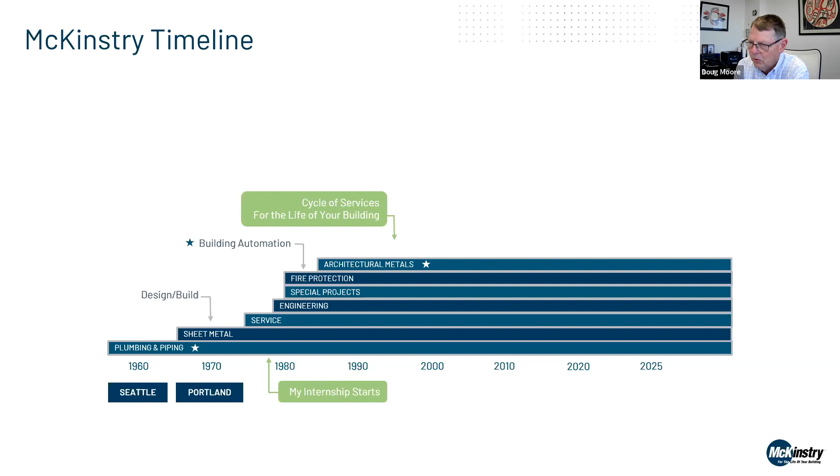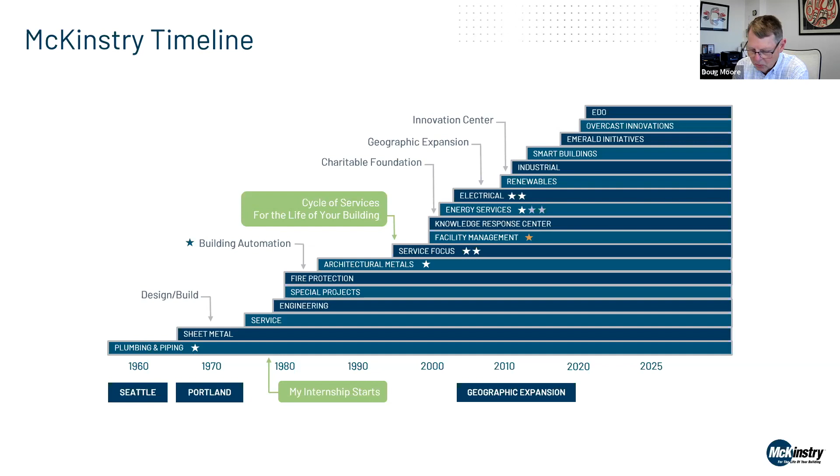So, in our planning meetings, we looked at our cycle as a company, and we would ride the economy up and sort of ride it down as we followed the new construction waves. We worked hard on some strategy to see if we couldn't level our revenues in down years. That gave us a focus on existing buildings and the tagline 'for the life of your building,' which was a real rallying cry. After that, we added additional lines of business, primarily focused on serving customers for the life of their building, not just new construction or major tenant improvements.

Again, two offices, even up through 2003. But as we started our energy efficiency work in 2000 as an ESCO, or energy services company, that allowed us to start moving across the country. So we do work in about 35 states now. We have an office staff of about 1,200 people, and field staff of 1,000 to 1,500 in the Northwest, depending on the construction cycle.

As we've evolved, we've come to these core beliefs: half the energy is wasted in the built environment, and half of the labor in designing, building, and operating buildings is wasted. These are generalizations, certainly, but we keep them in front of us because it points out how much customers need us in the built environment to take the waste out, either in energy or in labor, to lower cost. It also shows us how much innovation opportunity there is in the built environment. And this is our vision.

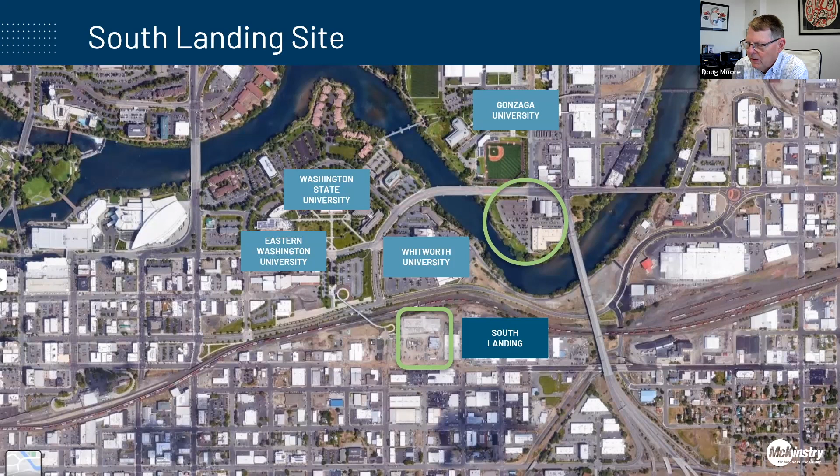And this is the project site, South Landing. It's on the other side of these railroad tracks, and definitely in the path of progress for the universities.

As the bridge was built, they thought, well, having the landing of the bridge be a substation is not the best for the universities. So let's change our plans. They made this property available for development, and there still is then a stress because that area needed a substation. So that's a whole other story.

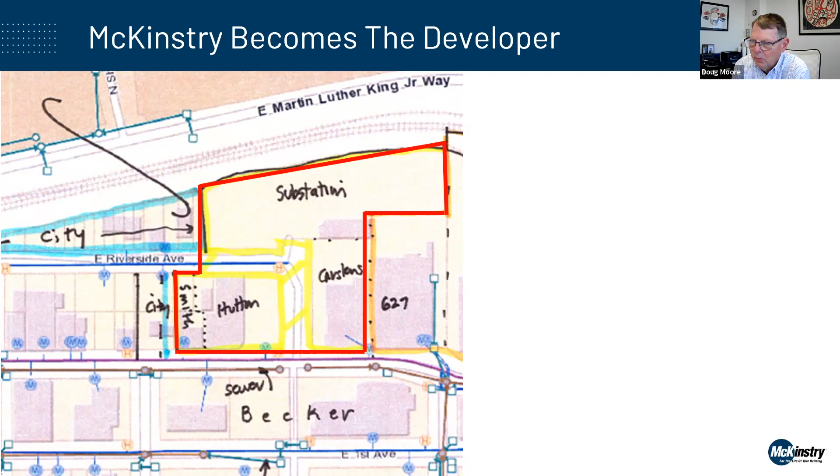But the utility has been a customer of ours for about 20 years, and through a turn of events, we became their developer. Certainly, the idea was to get a building underway. There was one university with a large program for computer science and electrical engineering, and they needed at the time about 70 or 80,000 square feet.

So Avista wanted to get this building going and see if they could lock up that tenant and use this as a way to get the district started south of the tracks. The initial pro forma was a 5-story building, steel and concrete, and code minimum. But the utility certainly didn't want a code minimum building. They were interested in how far energy could go in a project.

McKinstry, in signing up as the developer, our expertise is in designing, building, and operating buildings, primarily mechanical and electrical systems. But from an energy point of view, we have a holistic look at buildings, and we wanted to see if we could do something special as well. The site actually includes 3 other parcels, which were for future buildings.

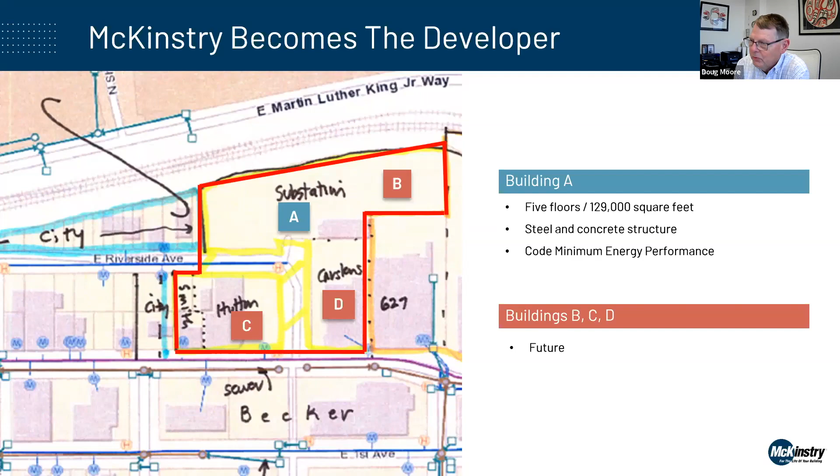So let's talk about budgeting. We had the 130,000 square foot building, steel and concrete, complete through finish and operations in the pro forma. In addition, we put a separate budget unrelated to the construction budget of 2.6 million, which we just labeled as improving the building generically. We did have line items, but there was no intent that the money would follow those line items. So that was our first step in trying to enable the building to have some additional features beyond minimum.

Also, we worked with Eastern Washington University as an anchor tenant. They have a lot of their own buildings in a portfolio. We used comps from the area, and did some extensive energy modeling. We came to an agreement on $1 per square foot per year for energy for the building that was to be built for their program, which would include their evening use of classrooms and so on.

So the benefit they got was a fixed price, but a low escalation. We put, I think it was a 3% escalation annually, which is lower than energy costs today are escalating. So they saw that as a benefit for the life of their lease. And what we saw then was the opportunity to have all the energy spend in our op cost, so that we could look at things like this.

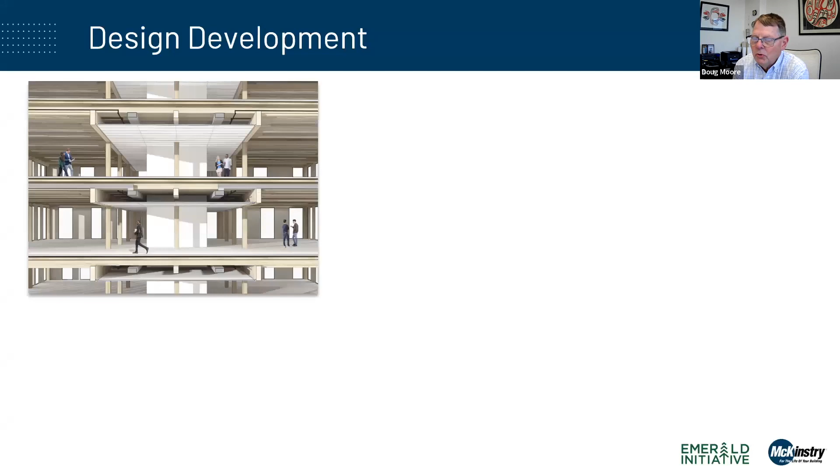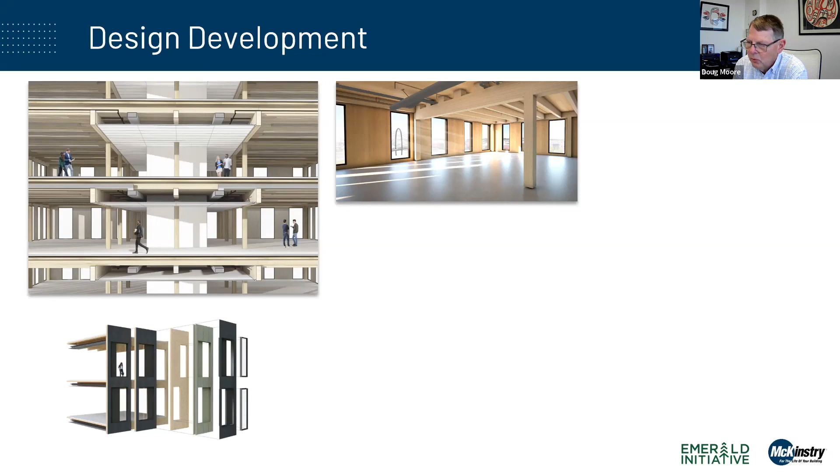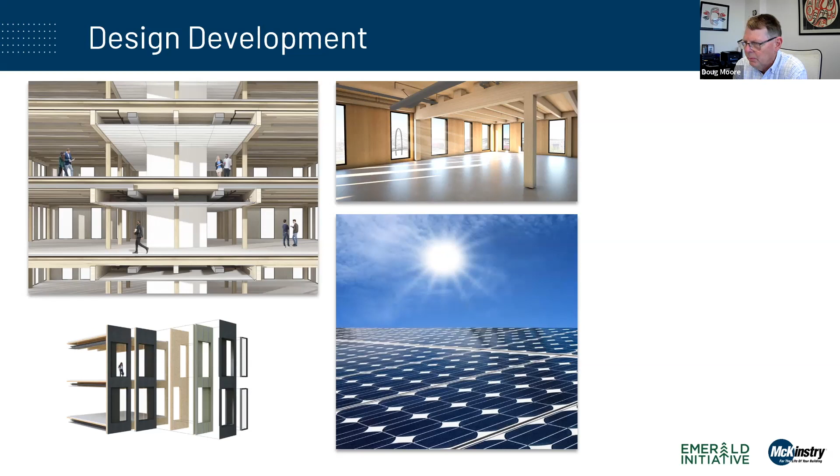So as the design progresses, early we did change to CLT. We started to get renderings of what the interiors might look like. We then looked at what we could do to reduce the energy use on the building, and so the building envelope became a focus for a month. At the end of that, we decided to go a passive house envelope. We certainly were going to put PV on the roof, but we looked at many different strategies for energy.

The building grew in size - we added a half floor at the lowest level. The structural grid was optimized for classroom use, which was a little hit to the budget. That smaller grid was more optimal for CLT. The CLT at the time was not a prescriptive path through the IBC, and so I think we had 8 different alternative means and methods submittals for permitting.

And then the EUI on the building - we think we would have been under 20 for maybe what you call typical office tenants, maybe not a technology office tenant for sure. But because of classroom use and computer science and computer labs, our EUI is about 24.

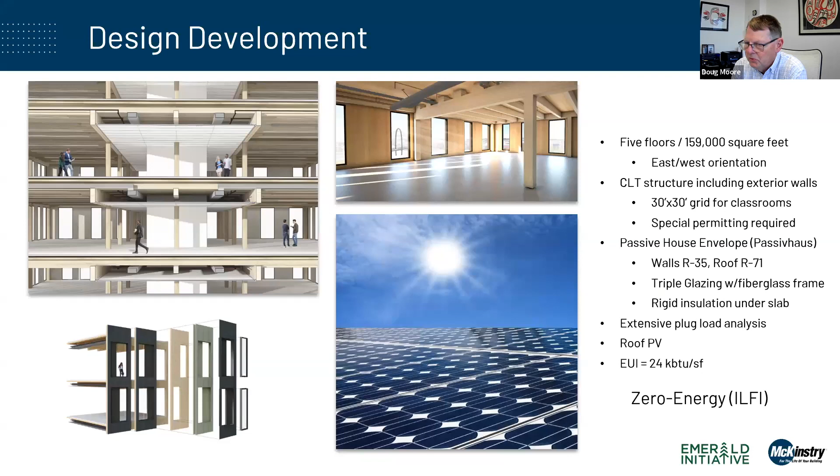So along the way, as we were looking at energy use and what we might achieve, we decided to go zero energy and use the ILFI certification.

So one of the areas that we spent some of that discretionary budget was countless energy runs and modeling. This is the most we've ever done on a building or set of buildings. In this slide, this was just showing one snapshot of the annual heating and cooling requirement and what kinds of equipment we might use throughout the year.

Where this started to become important is as we were working on what was going to be the central plant, we decided one of the energy use strategies was to put in a central plant instead of package equipment. We needed to know what the loads were to start to size those components and do it with an energy efficiency point of view in mind.

But then we started to look at zero carbon and what would that take, and we thought, hey, we've added all the risk we can handle with zero energy, so let's go ahead and take more risks. So we decided to go zero carbon as well, and that meant getting rid of the gas boiler plant and putting in an electric plant, and then certainly no gas in the building for heating of hot water, for any restaurant uses, and so on.

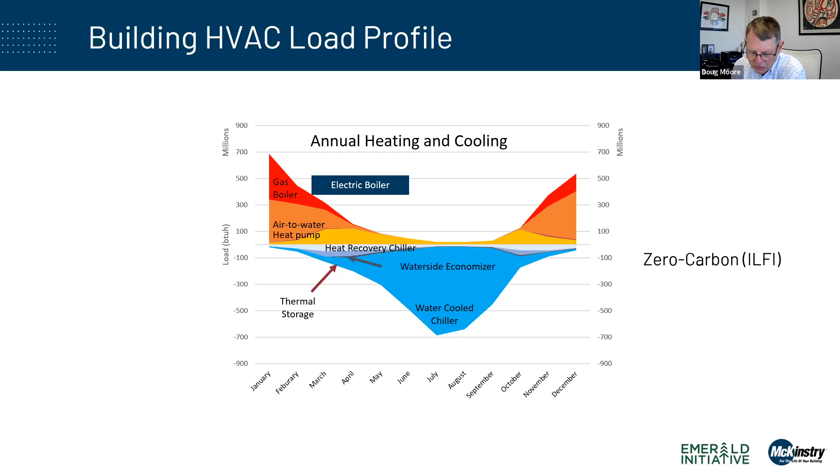So now as we start to think about the central plant, as design builders and estimators understanding the cost of these systems, we decided to take a month and set up a model for the central plant that had all of the different types of equipment, the size options for the equipment, the energy performance for the equipment at each size and within certain operating parameters.

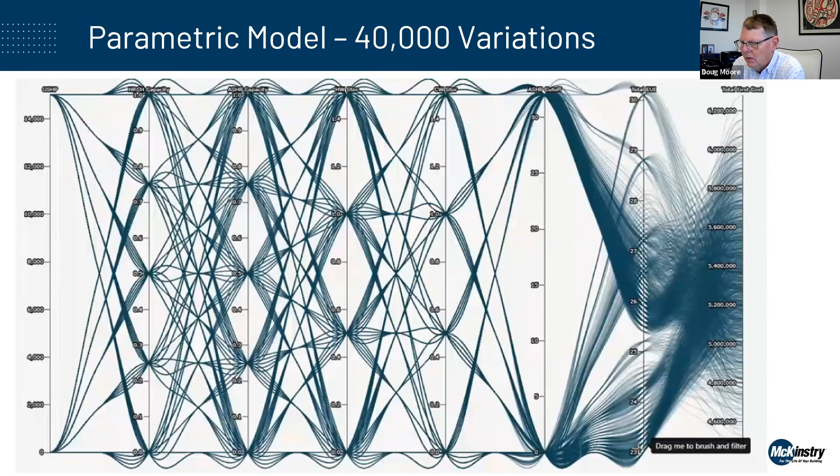And then we had to benchmark that against an ending EUI and the plant's allocation against the total EUI for the building, and then first cost for this plant. So it was like 40,000 runs in the end, but by spending a month and really funding a really good study, it made a very easy decision at the end.

The second bar from the right is an EUI bar. Sorry, these are hard to read. That right now is capped at 25. But what you see are three choices that were in there for plant options that kept us in the range of a 24 EUI and a reasonably low first cost. That was the whole game, was to figure out a cost-effective central plant.

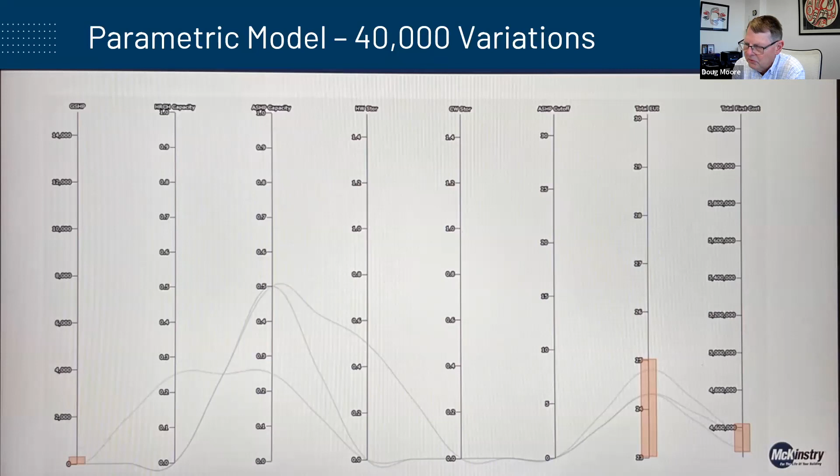So building A was the building certainly that we were underway on, and we found ourselves without room for a central plant. The program grew for the anchor tenant. They ended up taking about 3/4 of the building, and we didn't have the ability to go underground. This whole site is basalt rock. We even had unexpected expense to do some blasting to get rock out.

So we needed another slab on grade location. Fortunately, we had 3 other parcels, and so we decided to accelerate a second building. So we had a location for the plant, and we thought, well, we'll just do a 2-story building, and on the first floor somewhere we'll put this plant. The 2-story building, as a developer, was not a good idea. That didn't pencil in a pro forma.

These are independent properties. So we decided to go ahead and make that a 4-story building so that it would pencil. And now we took on additional leasing risk. So the risk is compounded as we move along in the project.

And then we decided, certainly the plant is going to go in this building, but we wanted it to be on storefront so we could showcase the plant to the community. The idea of this development, as it was evolving, was a public-private partnership around energy and the future of the built environment related to energy. And so we wanted a way that students on campus or the public walking by could see that.

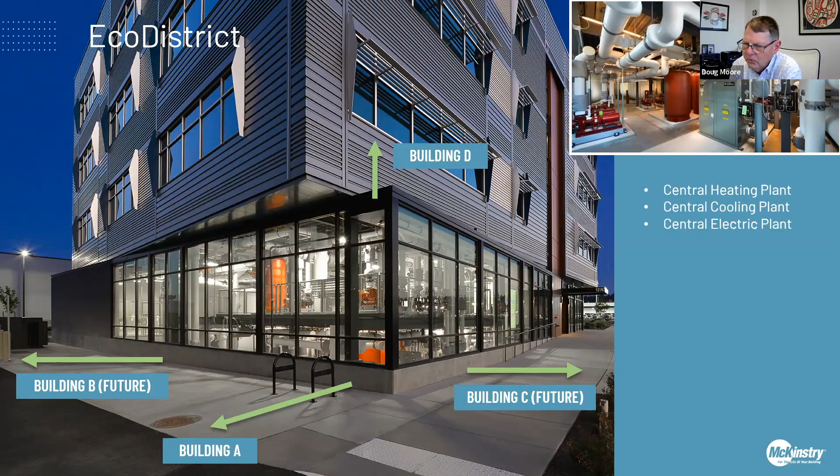So they chose to, through their abilities, allow all the electricity to run through here, which was unique. But more importantly, it started getting them into the conversation of a grid integrated building, and this became an eco district serving 2 initial buildings, but also it has connections for the next 2 buildings. And so this central operation was really interesting to the utility.

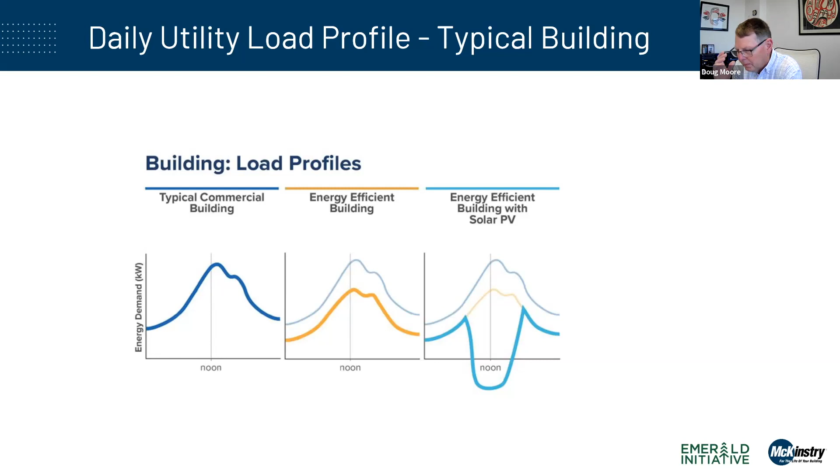And their conversation was, we already have all this variability on the grid with renewables and all that world we live in. And now, as the world goes zero energy, look at the other compounding effect that we have in serving buildings that have widely varying loads, either by day or annual. So this was their interest in how buildings should operate on the grid.

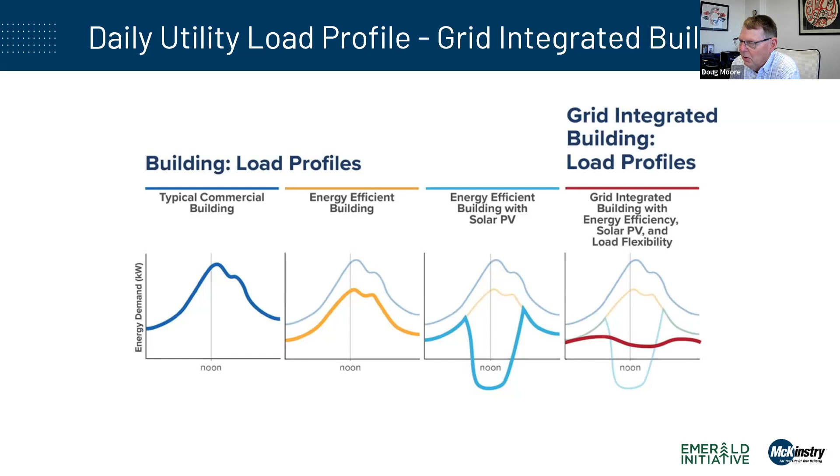And to do that, they joined us as a partner in this eco district. So they're a partner in that, and it's a separate entity. And we expanded the thermal storage, and we have battery storage added to the plant, although the supply chain has caused us a problem there. The batteries are not yet delivered. We thought they would be here by now, but they're not.

So as an example, in the thermal storage, we put substantially more storage in than we needed just for the energy efficiency interest of being zero energy. We can carry the building for a full day on a peak heating day in the winter.

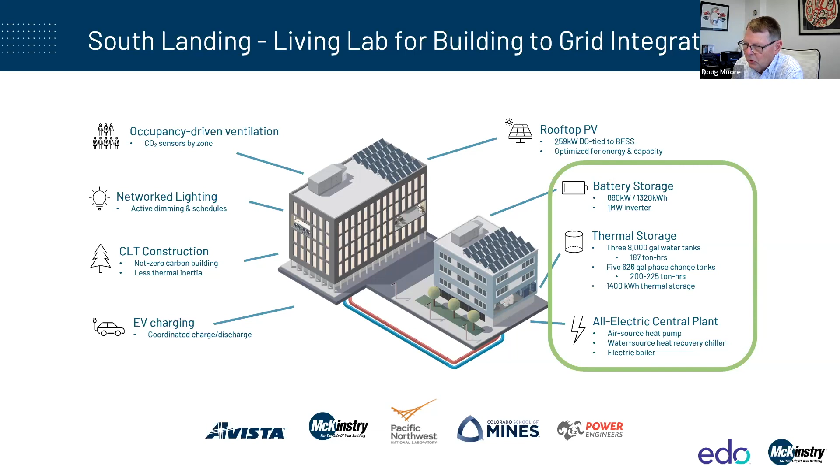And these thermal storage tanks are changeover, so they can be heating or cooling. So with batteries and thermal storage, now we have a real opportunity with the utility as a partner to look at how we can decouple these buildings from the grid.

We have a lot of expertise in real-time monitoring buildings and operating them from a thermal comfort and energy use point of view, but adding the grid component into the strategy was new to our team—writing those algorithms and understanding that in detail.

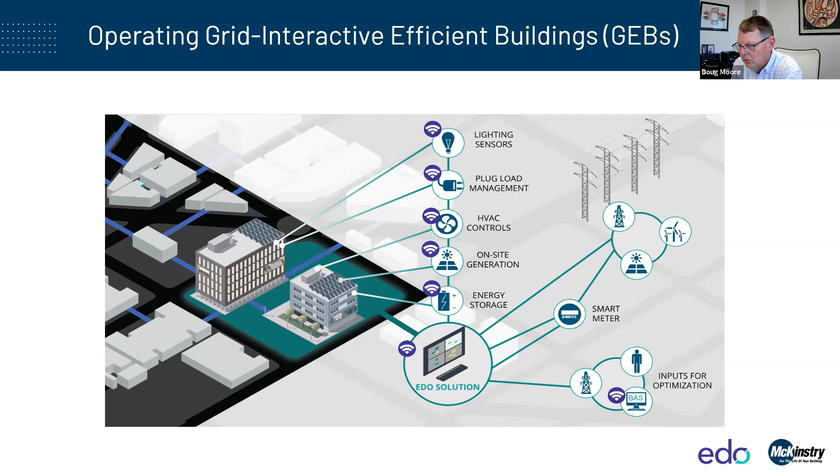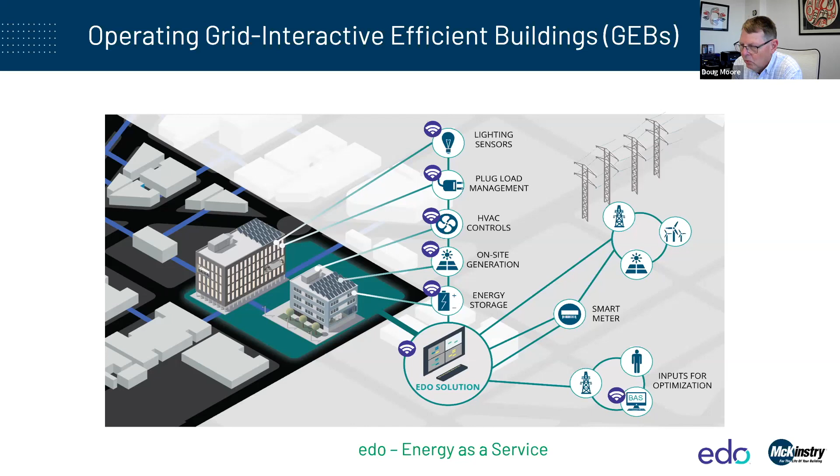So with the utility, we formed another company, an operating company, to operate these properties, but also to provide the service to other customers—energy as a service, where you're not only serving the needs of the building for thermal comfort and low energy use, but also taking grid signals through the utility and getting hired by utilities elsewhere or their customers. So that's another company that came out of this.

So we got the building delivered on time. September 2020 is when students were in class. Zero energy, zero carbon. The second building, which had to catch up, it was quite a complication—when we decided to put the plant there, it now had to finish on time with the first building, but it started substantially later. But it came on in September 2020.

So now let's rewind the clock a little bit. I skipped over the tenant improvement topic. So again, turnkey TI work, including FF&E, and the rendering you saw earlier in a wood building.

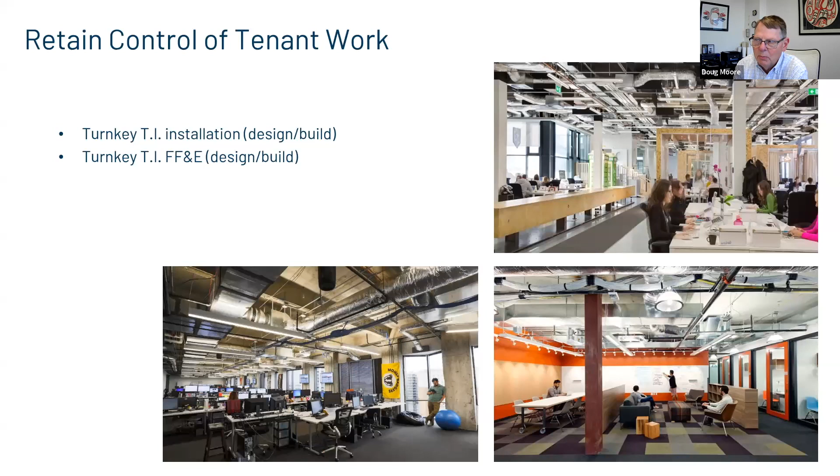We started to think about the MEP systems, and we were the design builder of those systems. So what would happen if we did the industrial chic look like other steel and concrete buildings? We thought, well, that's probably not the best look for our building, because this is what our building looked like.

Initially we had a budget for ceilings for steel and concrete, and when it became CLT we decided we wanted no ceilings. But then, are we going to be the biggest problem in mucking up the look of the building when you look up with our mechanical, electrical, and data systems?

So we thought, well, how do we organize against that? The architect may well need some ceiling clouds for acoustics. And if that were to happen, maybe we could talk the architect into using them throughout the space, and that might give us a way to land MEP and data devices and begin to organize ourselves visually.

And so that's what we did—we put ceiling clouds in as a design. We had to develop and create those, both with finishes.

We went through several iterations of how do you build them, what would be on the devices or on the clouds, how far apart for lighting, and how we organize the MEP pipe and wire above the clouds. So you see cable tray with duct and pipe and line voltage actually in the cable tray, and we had to go through some permitting hurdles for that.

But this ended up becoming the organizing element. Just some other pictures.

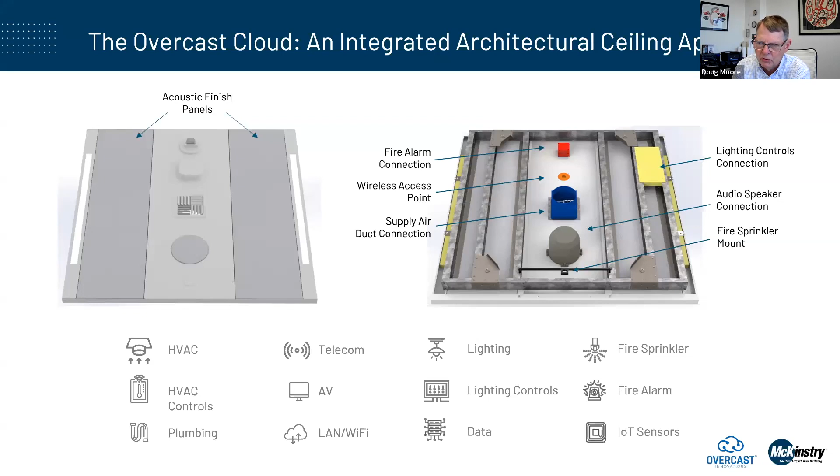And that journey—we have never developed a product before, especially an architectural product. So then the iterations we had to go through of, okay, well, besides just what we did in our building, what systems could land or be involved in clouds?

We knew what we went through to change the who-does-what during design, procurement, off-site work, and on-site work on our projects, but we had to be much more thoughtful, because when you bring these ceiling clouds to a project, it changes who is designing the component, who is providing it, who's commissioning it, and so on.

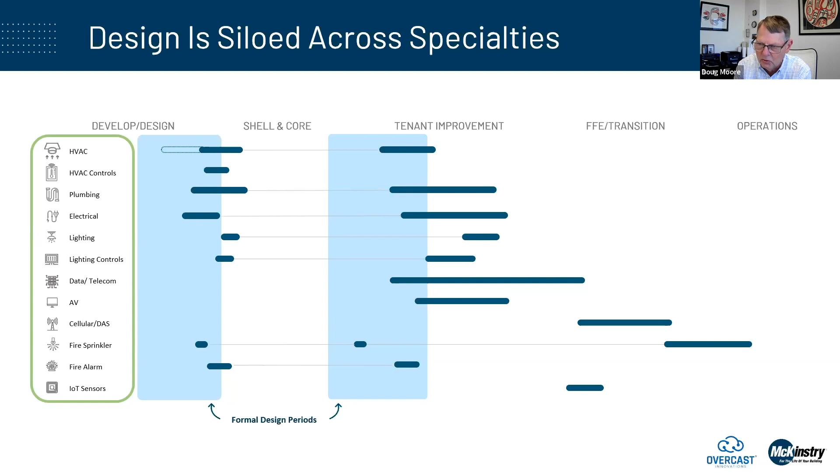So we had to be ready for a design team to help them work through these changes. Otherwise, what could be a good idea for a project would just get stopped because it's difficult to understand how to put it into the project.

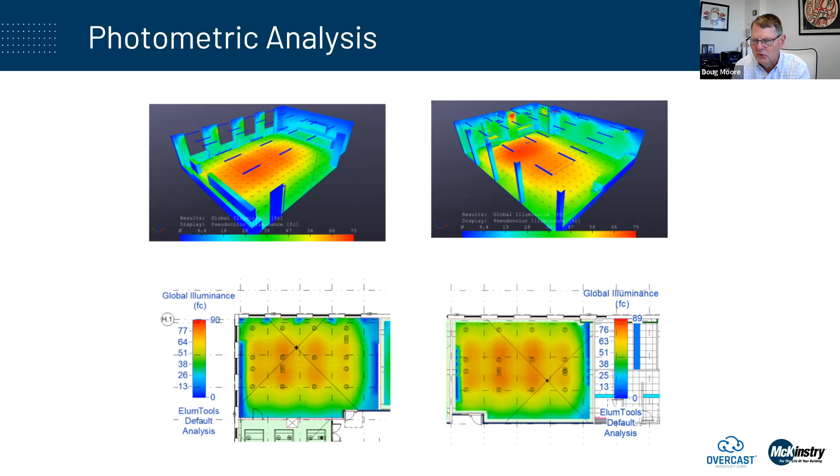When the architect is moving ceiling clouds and the lighting is on the cloud, in some respects that complicates the photometric analysis on a project, because now the architect is just moving lights as they move a cloud. So we added photometric analysis in our team in case that was a need on a project, in case the lighting designer or electrical designer wanted that to stay with the cloud design.

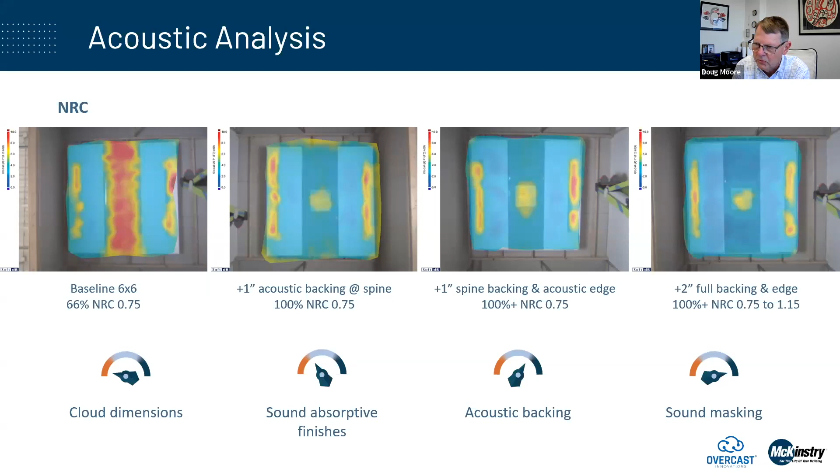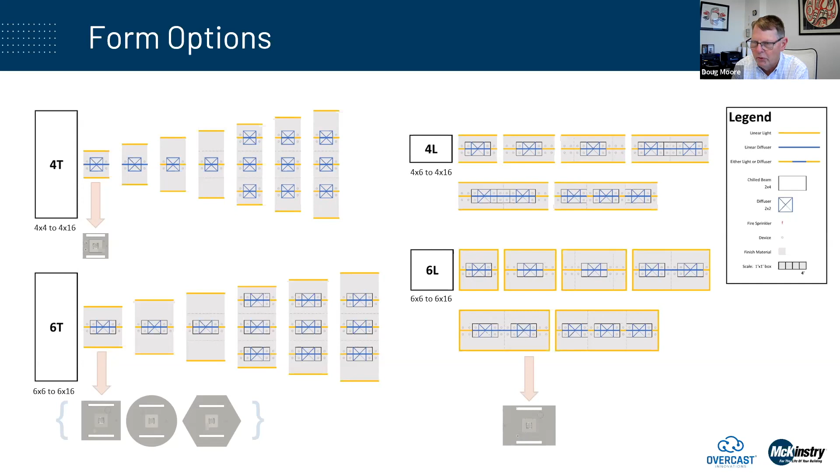We did a lot of acoustical analysis so that as we added different finishes on clouds, the architects could have information for the acoustic absorption of the clouds. We certainly were in the seismic zone, so we added seismic options for the structural system of the cloud. And then we looked at different configurations that architects might need or enjoy, rather than just one or two sizes or shapes.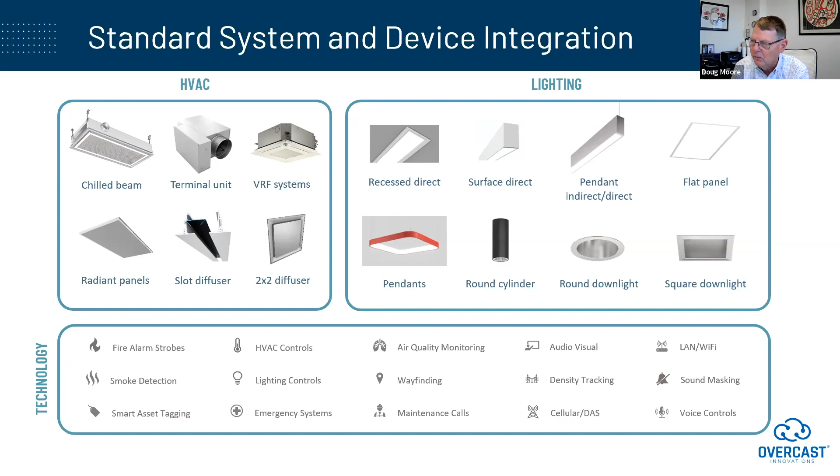And then we went through lots of different finish options we could provide. One of the hardest parts was actually looking at all of the IoT and data intelligence on the clouds. That's one of the big opportunities, that it comes as a system with IoT, so we had to be ready for all of the low voltage and wireless information.

One of the last things we had to do was help with draft documents for the change in contracting on projects, when all of a sudden there still are the mechanical and electrical consultants and installers, but now you've moved the cheese on everybody's plate for who's going to provide, design, or install various parts of the systems.

So we've done a lot of work to be ready for teams to go through the process of being contracted appropriately. And we have found in this journey, we now have several OEM relationships with our factory, so that as we provide a cloud, we're working direct with the factory for lighting or temperature sensors and so on. We're starting to see how much markup there is in the supply chain we deal with on all of our other projects, one reason why building costs so much. So there's a lot of opportunity as you move off-site with manufacturing to take some of the cost layers out.

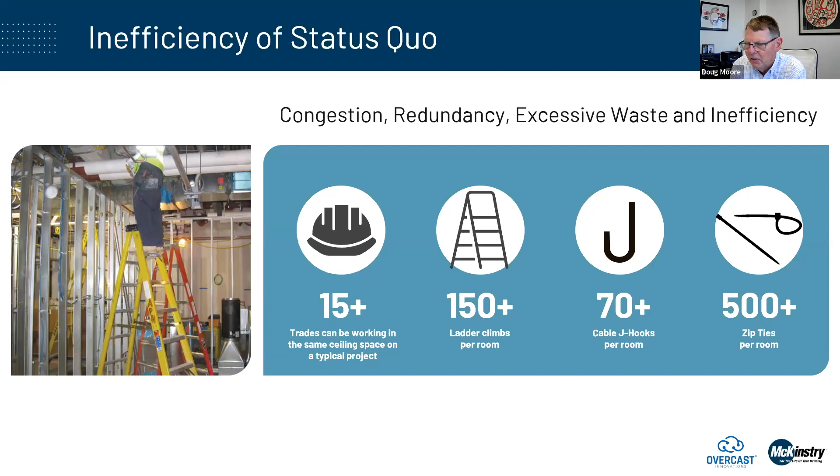We also saw, certainly on our project and others we're involved in, how many ladder trips are saved when you use this kind of a system. That's a significant topic.

Some other benefits: it really did change the critical path on the schedule, so it was a little shorter. Commissioning in the end was easier because the systems were pre-commissioned, all the devices off-site, but we also had to have more finite designs of all of the in-ceiling work to support the off-site manufacturing of the MEP pipe, wire, and cable trays. So that was a big benefit.

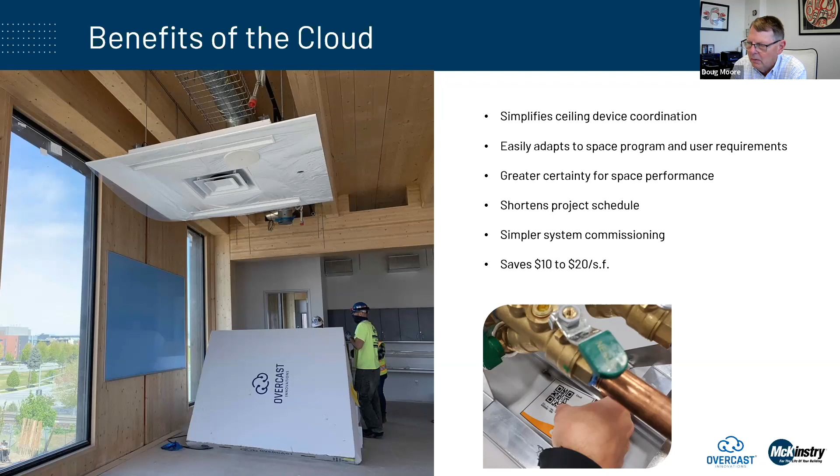And the projects now that we're involved in are penciling out. Ours we held cost neutral. We had a lot of R&D and startup costs to do this, but these really can be cheaper on a project as well.

And we've now looked at other kinds of uses. Certainly these can be in a suspended ceiling; they don't need to be just in a type of occupancy with no ceiling. You can get some pretty interesting techie looks. We're getting a lot of interest from life science applications because we can add the hookups in the cloud.

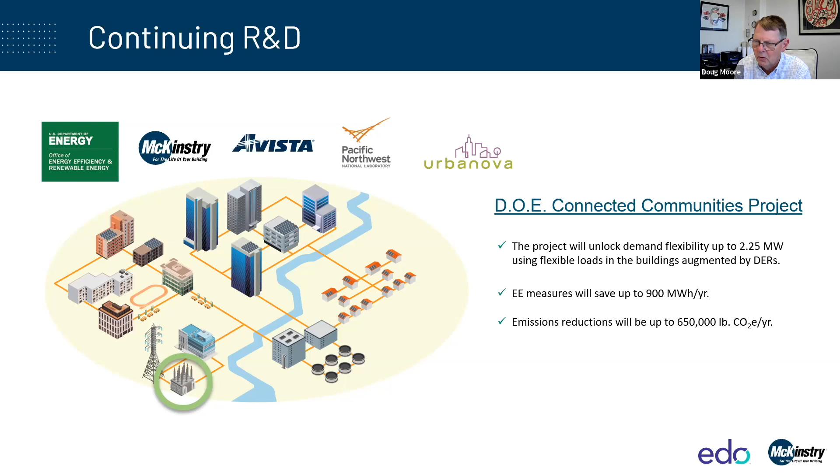We had launched the Eco District in partnership with the utility. We launched EDO in partnership with the utility. We have lots of other capabilities with the utility and these other companies. And so this team competed for a DOE grant for a neighborhood scale, grid-connected buildings operation project, and this team won. So now the operations group formed and headquartered around these two buildings is getting to expand expertise by working in a larger neighborhood in cooperation with the utility and with DOE.

So for a recap: again, we set aside some budget. I think the quote from some of the design team was that this is the first project where they heard yes more often than they heard no. So we always tried to find a way to make time for ideas that came up. What started as steel and concrete went to CLT, then passive house, then we had an eco district, then we went zero energy, zero carbon, and now we have this living lab.